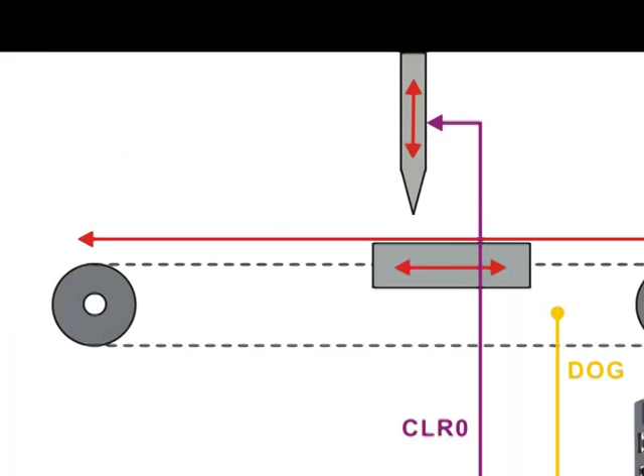Feed-to-length applications are a type of application where product needs to be moved a set amount for processing repeatedly. Machines like vertical form fill and seal machines, sleevers, web processing, and labelers all make use of this functionality. This video will show the many ways Delta can solve this application style using the A2 servo drives.

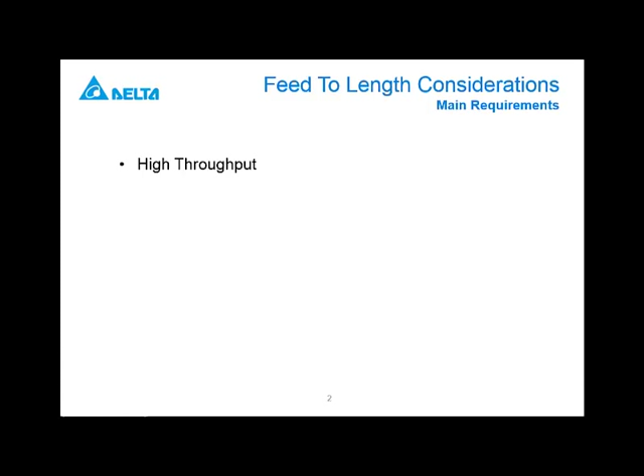Some of the primary challenges of feed-to-length applications include high throughput, maintaining high accuracy, and maintaining flexibility to be able to change cut lengths on the fly.

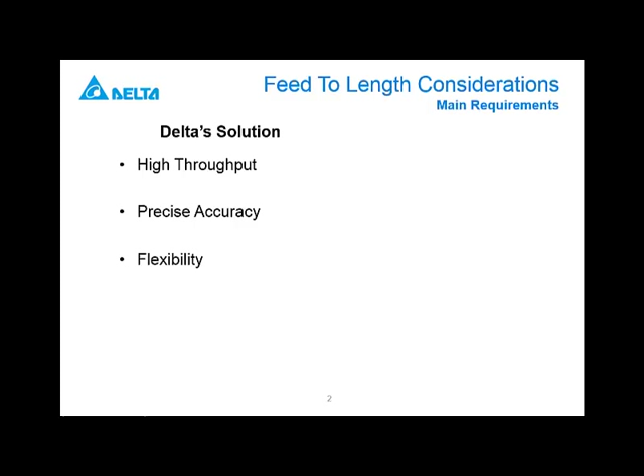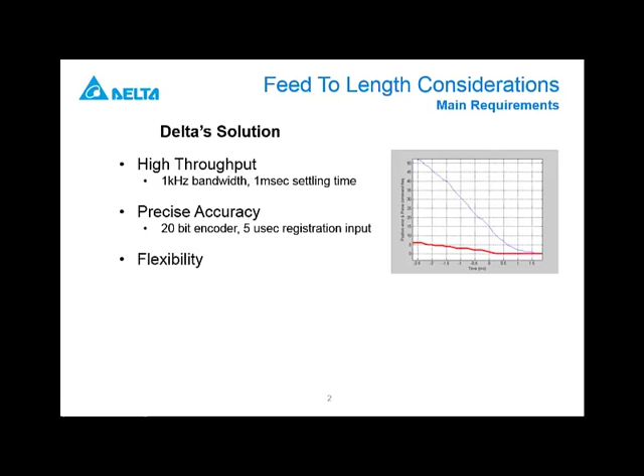Delta solves this with the A2 servo drive by having built-in motion control with a high-performance drive. High throughput is maintained due to a 1 kHz bandwidth and 1 millisecond settling time of the drive, while accuracy is achieved with a 20-bit encoder and 5 microsecond position latch input. Finally, built-in motion on the drive and software wizards allow for complete flexibility in controlling machine speed and feed lengths.

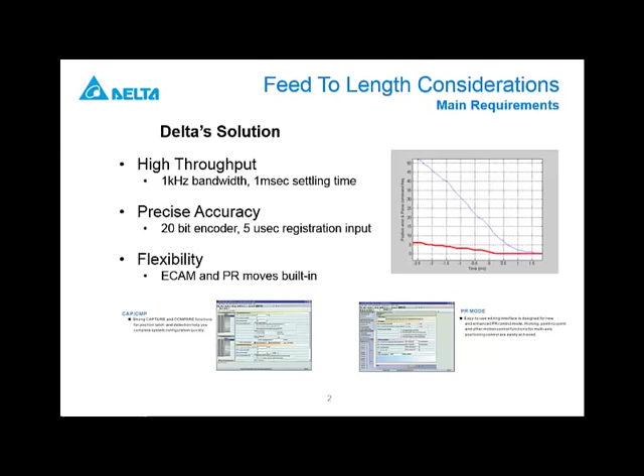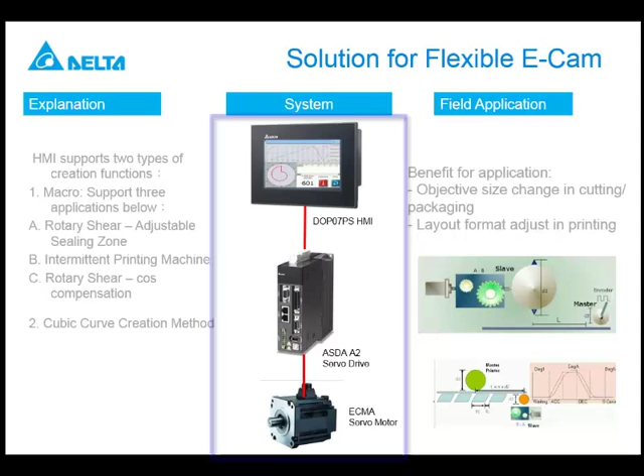There are many vendors and solutions to choose from, but Delta is able to provide unique solutions with pre-canned features that you cannot find anywhere else. These include the ability to perform ECAM manipulation and download from an HMI directly to the servo drive without the need for a PC or a PLC in the system. Another unique feature is the ability to program both the HMI and the servo drive with a single off-the-shelf cable.

We're going to briefly map out 4 different solutions to a feed-to-length application, which are titled Feed to Incremental Position, Feed to a Registration Mark, ECAM Move via External Pulse, or ECAM Move via Internal Master.

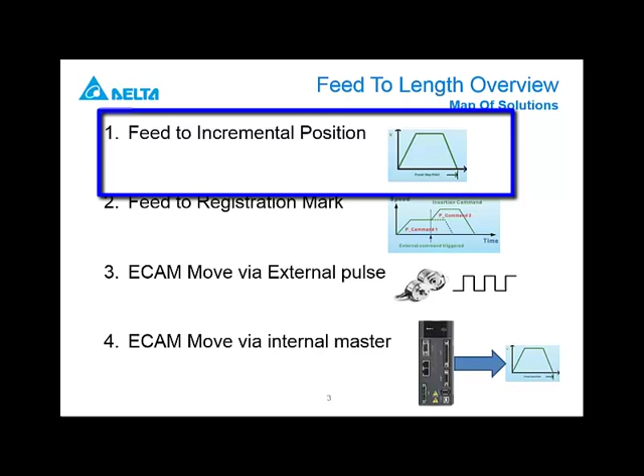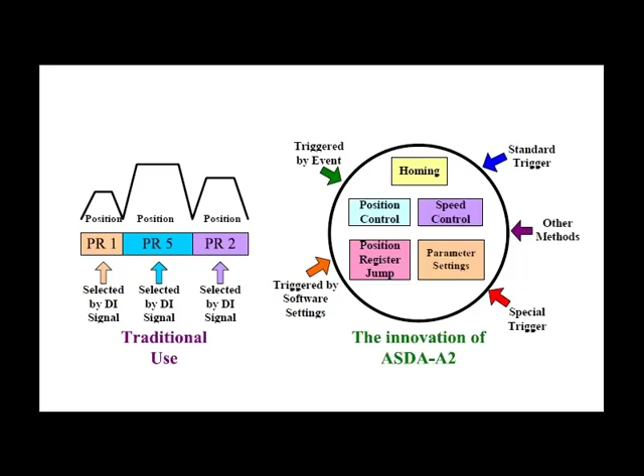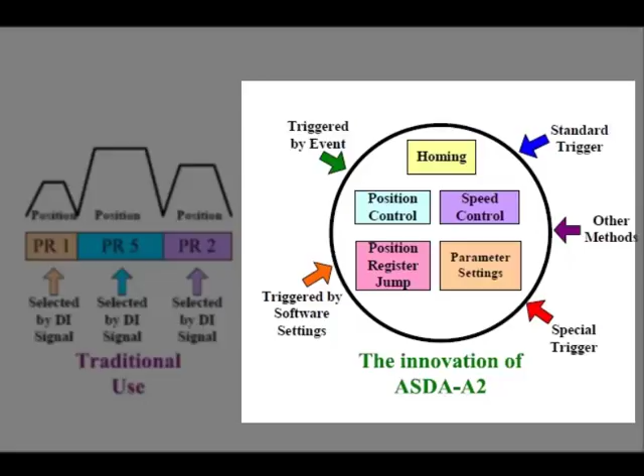The first and simplest is to do an incremental move, or move a preset distance every cycle. This method solves the application with the A2 drive and its built-in program register, or PR mode. Delta's PR mode goes beyond traditional indexing drive functionality by providing multiple triggering methods, advanced functions like program jumps and parameter modification, and flexible motion profiling between points.

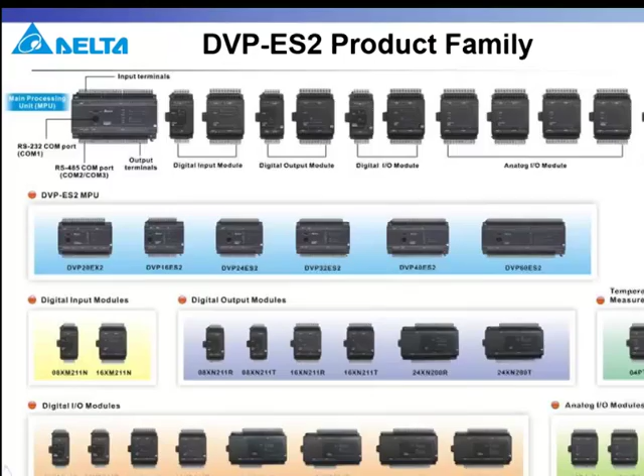Delta's software wizards make setup easy, and flexibility can be maintained using an HMI or PLC to control external timing or change delay times. The next method uses a registration mark on the capture input of the drive to index to a position past that registration point.

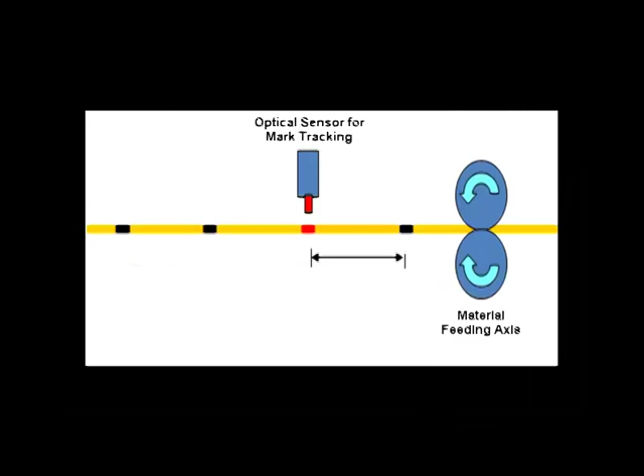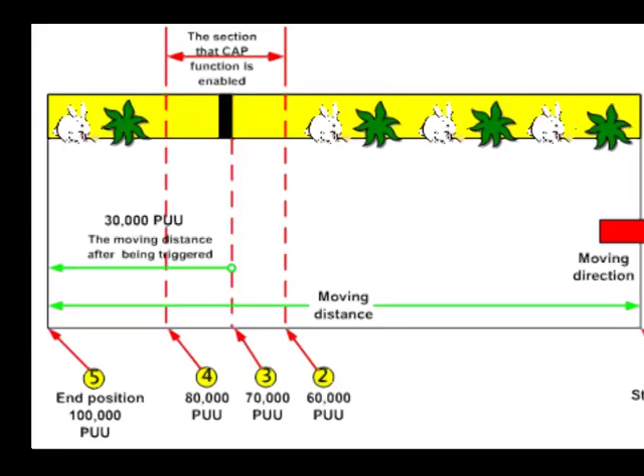This method is similar to the first solution, but includes use of the capture input and its ability to trigger a PR move upon capture. This method has built-in corrections for missed marks, as well as masking functionality for incorrect mark reading.

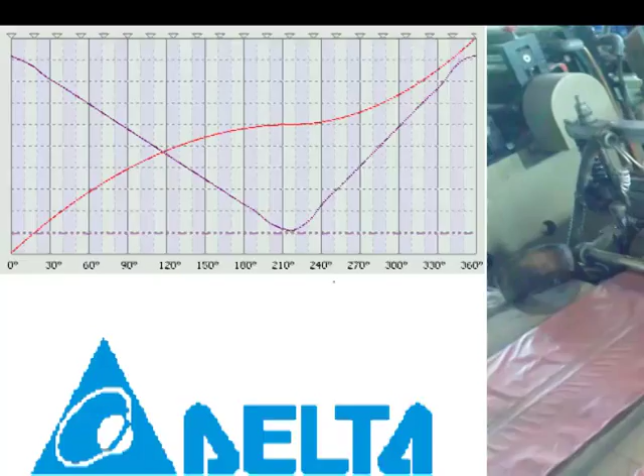The final 2 feed-to-length solutions both employ the use of the built-in ECAM features of the drive. Using an ECAM to create the feed profile allows for the ability to create very smooth profiles that don't employ simple S-curve profiling. This can allow for very smooth current draw, lowering the overall RMS current of the system and creating more efficiency. This can also reduce the jerk in the system, which can damage material.

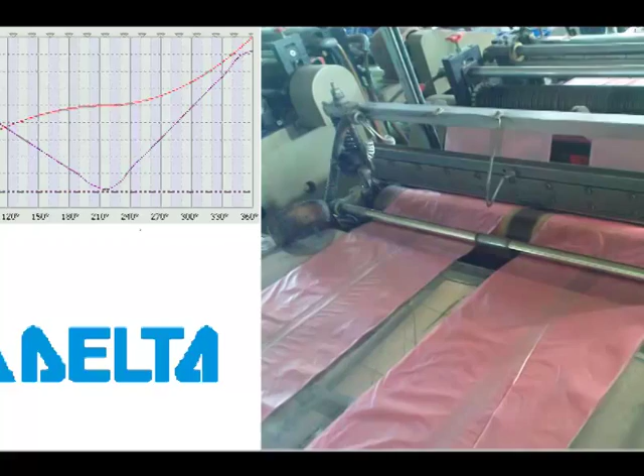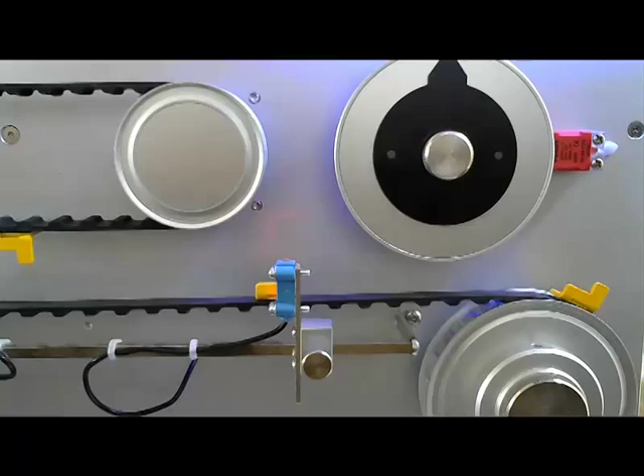The first of these 2 solutions can use an ECAM profile that is controlled by an external pulse that is fed into the 1.5 axis port of the A2 servo drive. This pulse can either be an external encoder reference, or it can be a pulse from a PLC or motion controller.

The fourth solution allows for the ECAM move to be controlled via the built-in internal virtual master of the drive. This virtual master can be an internal timer or a PR move.

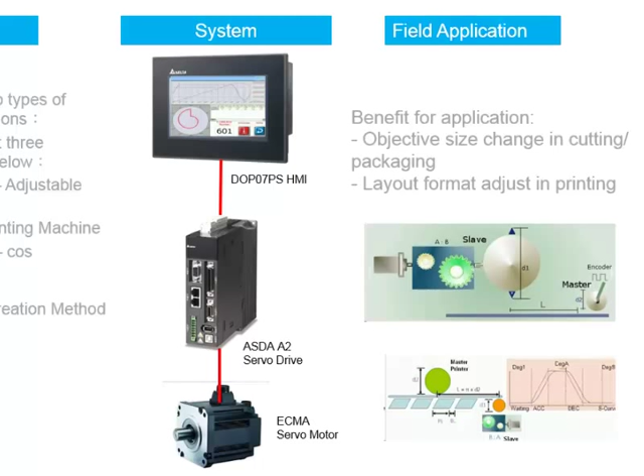In closing, we have shown how feed-to-length applications can be solved a variety of ways using only an HMI with ECAM editing functionality, A2 servo drive with built-in motion, and software wizards, all of which are designed and manufactured by Delta products, providing you with one manufacturer, one source, and one support.